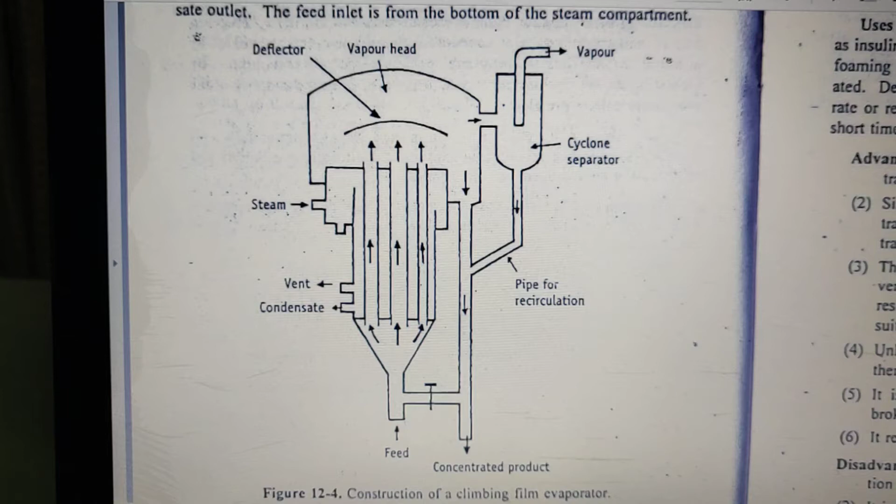Okay, now we'll take the third evaporator, that is climbing film evaporator. First we'll see from the book.

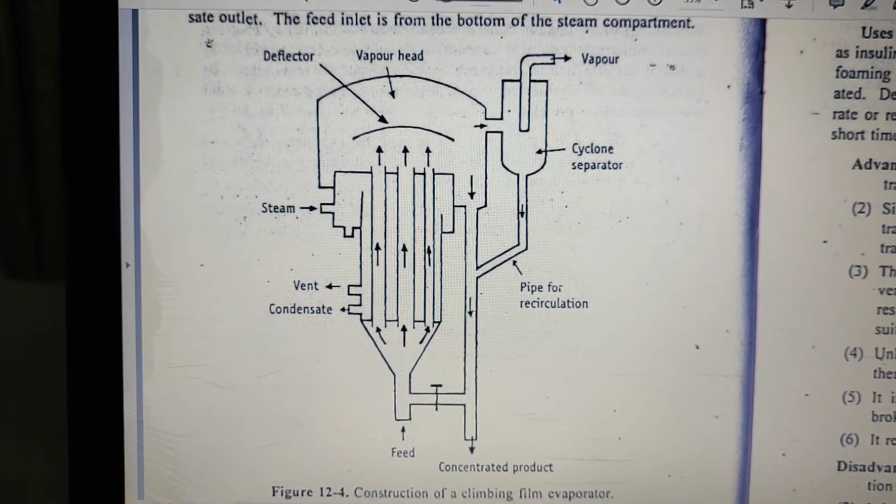From the diagram we can see clearly how the principle is there, and the principle itself explains what is the working of it. So you can see here you don't have tubes immersed.

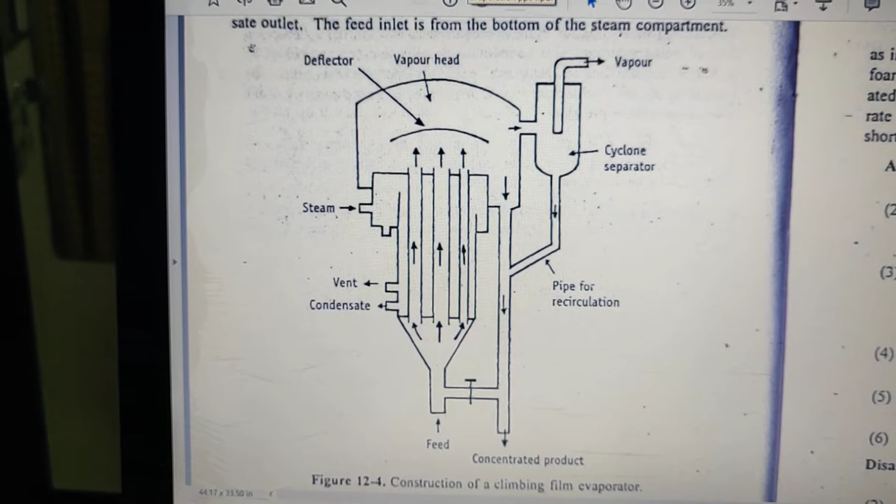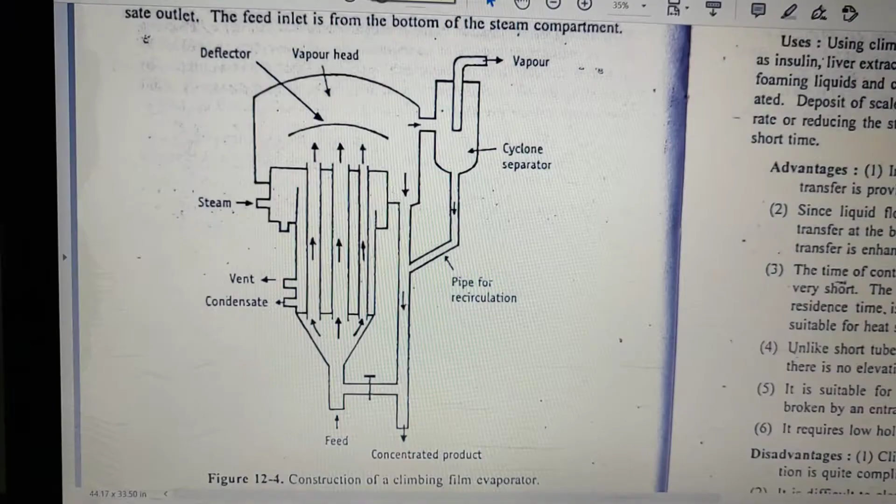Here what is fundamental is that the tubes are heated separately and your feed is heated separately. So what is the major advantage of this? Because these things are heated separately, the contact time in between the steam tube and your feed is very less. Steam means boiling, so you will not have a large amount of contact time between your tubes and your feed, and hence thermolabile substances can be very nicely evaporated using such evaporators, climbing film and even the next one, falling film.

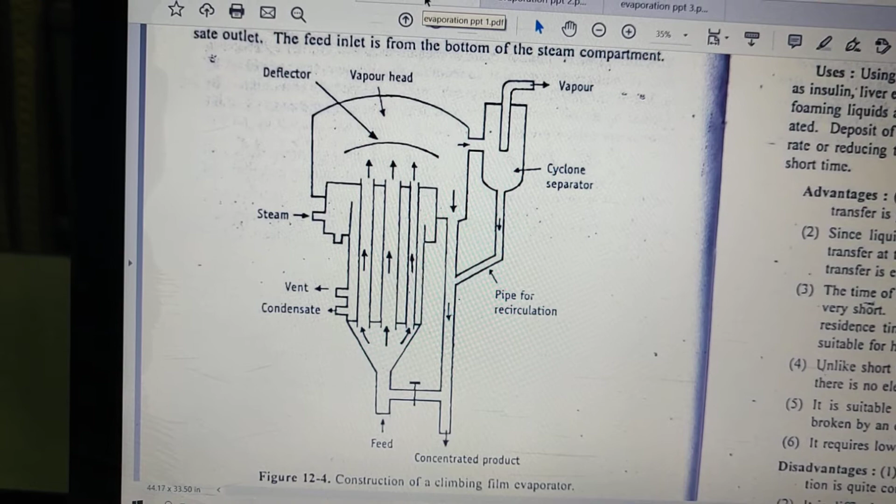So first we will see this. You all can see you have steam inlet, you have tubes, then feed inlet is there from which feed passes from the bottom to the top. So now it is not like your complete feed or solvent is immersed in it, or your tubes are immersed in that. You have different inlets for feed and steam.

Then you have two outlets. One is for vent, that is gases, and condensate. The condensed gases and non-condensed gases, whatever are there, get removed from vent and condensate.

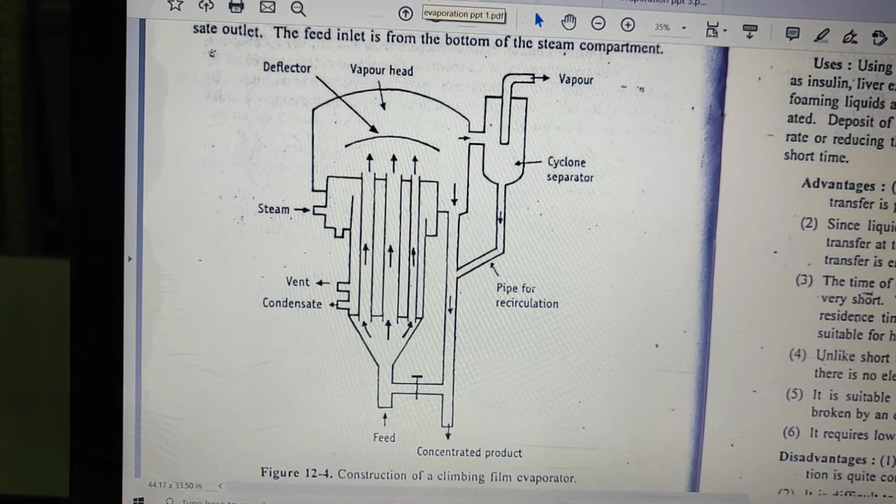Then you have a deflector. Now deflector is, we will see in the working, how the vapors form bubbles at the walls of the tubes, and these bubbles come together to form bigger bubbles, and then you have your concentrated feed also that goes from the bottom to the top.

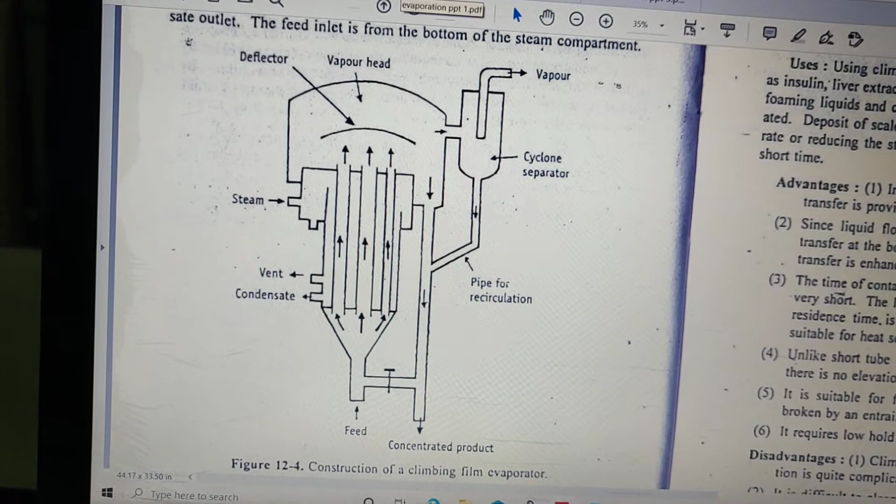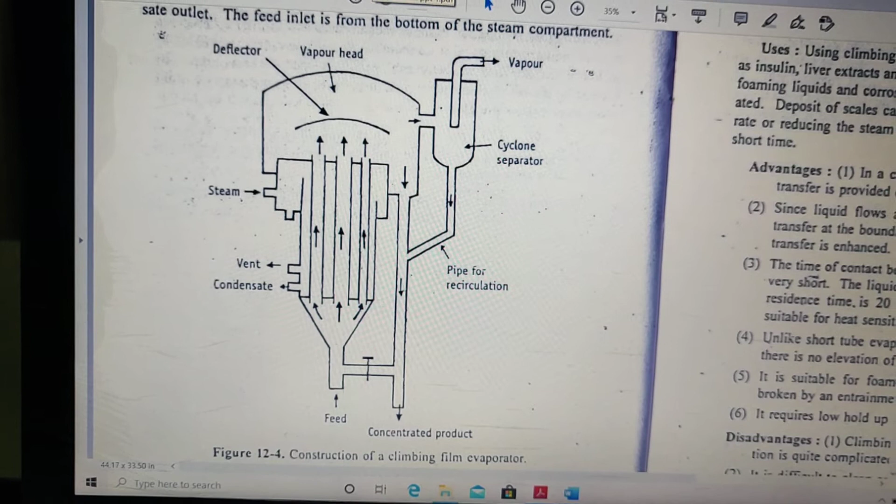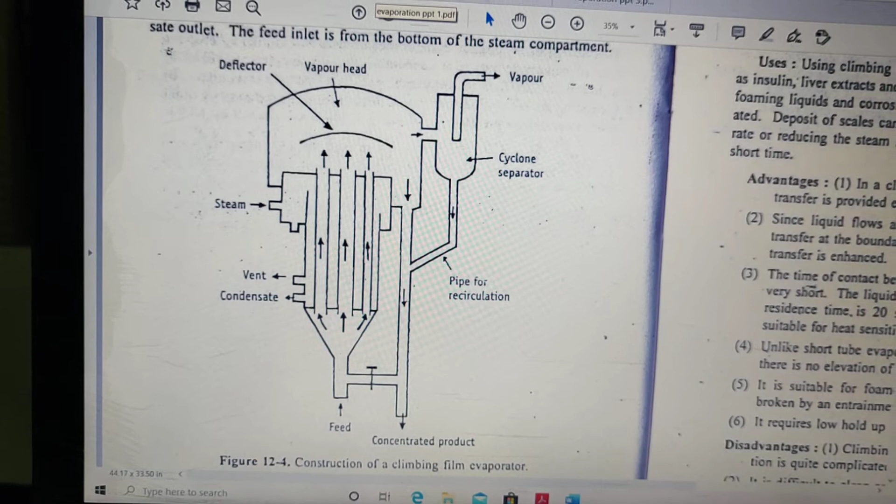So at the deflector your vapors, your bubbles and all come together and they are removed, you can see at the right hand side, from the vapor outlet, whereas your condensed feed goes down due to gravity, it comes below. So from the area at the bottom, where your feed was going inside, from that area itself your concentrated feed will come down.

So cyclone separator is something separate, you all know what cyclone separators are. So that separating device is very good for removing vapor from the top outlet, and your feed from the bottom outlet.

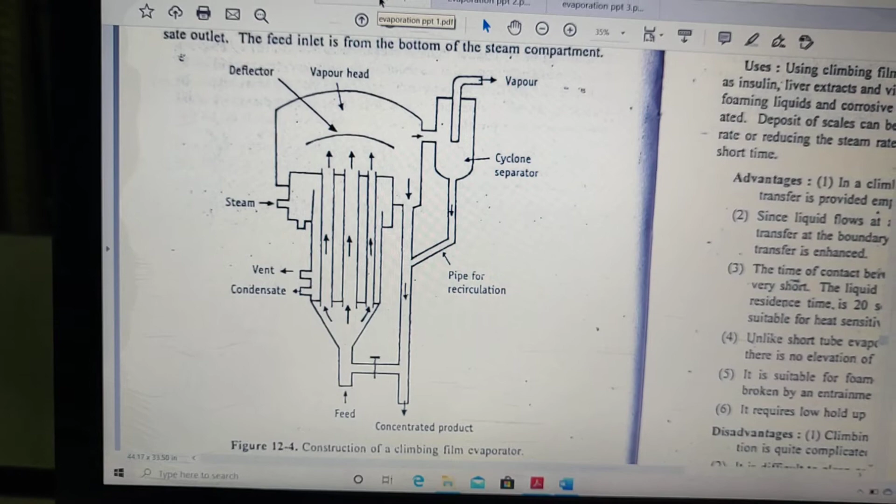Okay, so now I will tell you this in short. So what is the principle? Tubes are heated externally by steam, okay, that is boiling water.

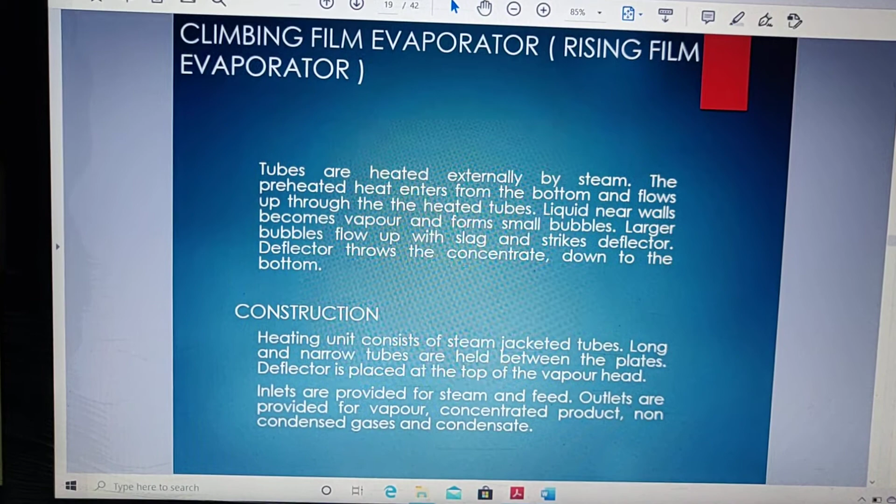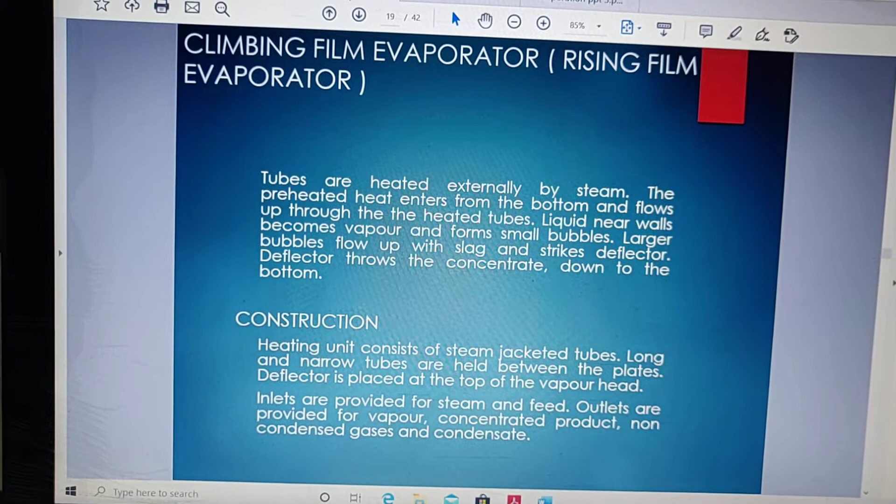Then the preheated feed enters from the bottom and flows up through the heated tubes, hence contact time is less. Then liquid near the walls become vapors and form small bubbles.

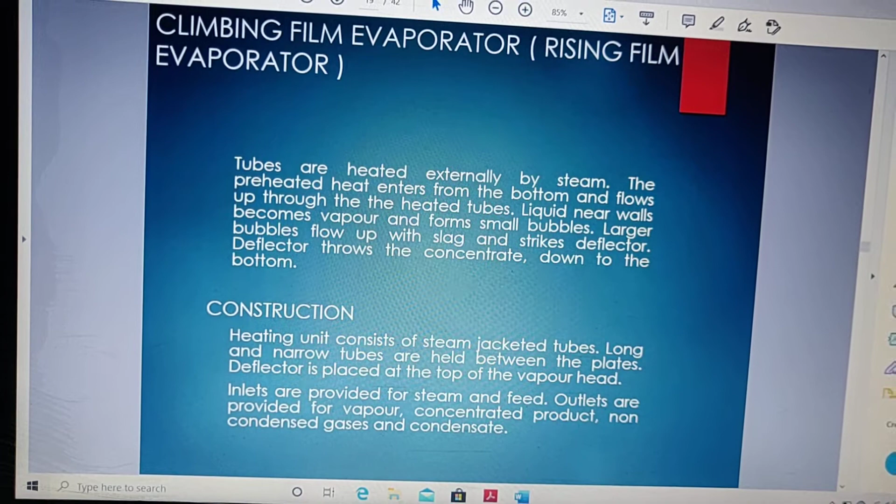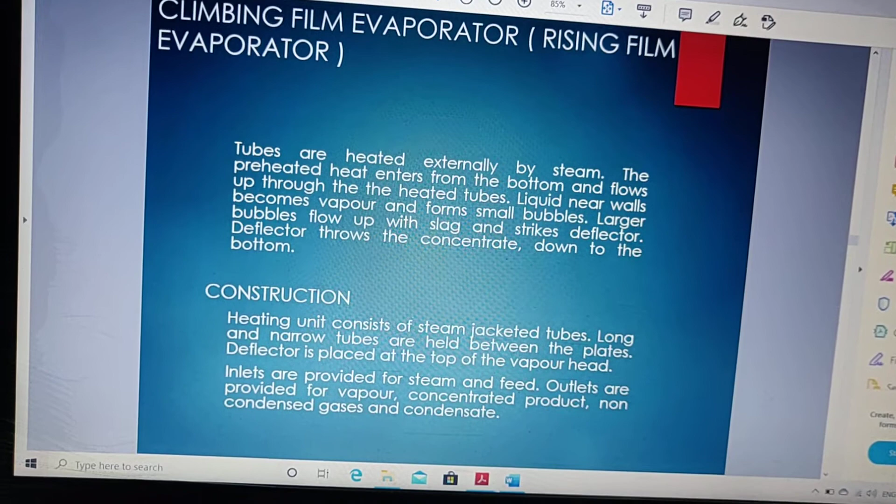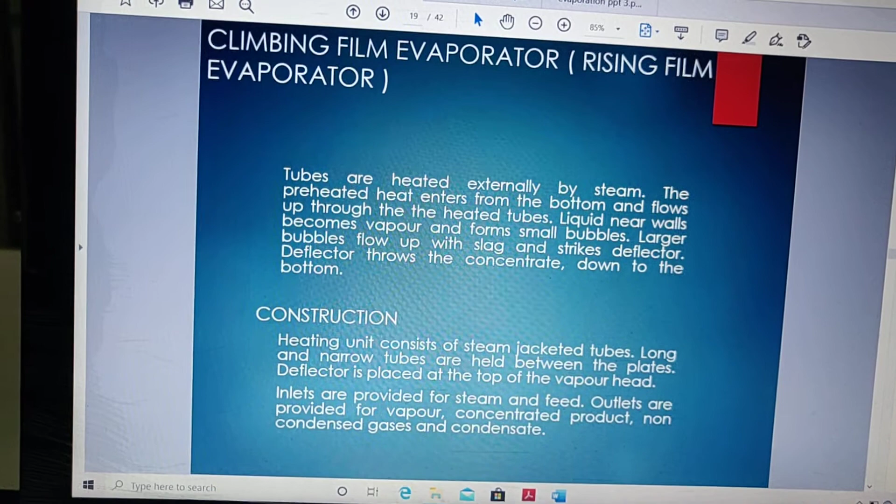Larger bubbles flow up with the slug - slug means whatever mixture is formed after heating goes up. So larger bubbles flow up with slug and strike the deflector, meaning something which deflects, like in meters you have digital meter reading, similarly you have a part of instrument which is a deflector.

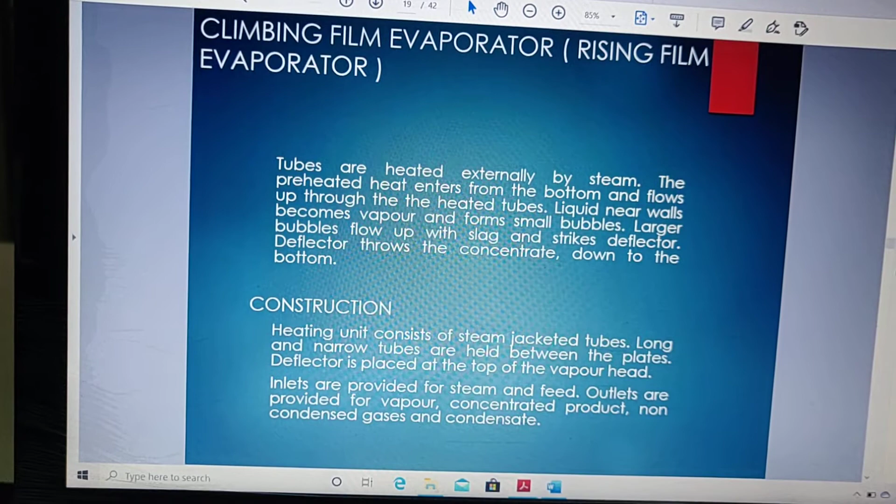So the deflector throws the concentrate down to the bottom, that is your product. Your concentrated product is thrown at the bottom due to its weight and due to gravity, whereas your lighter bubbles, that is the vapors which are evaporated, are thrown outwards at the top outlet.

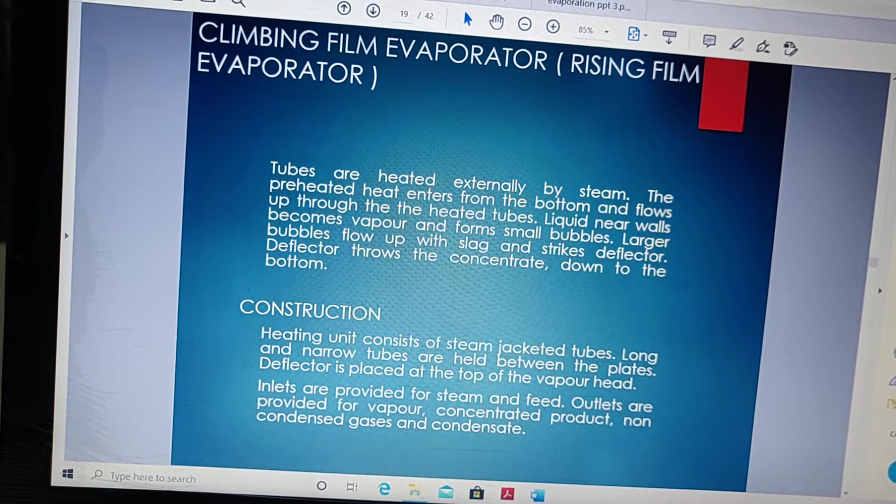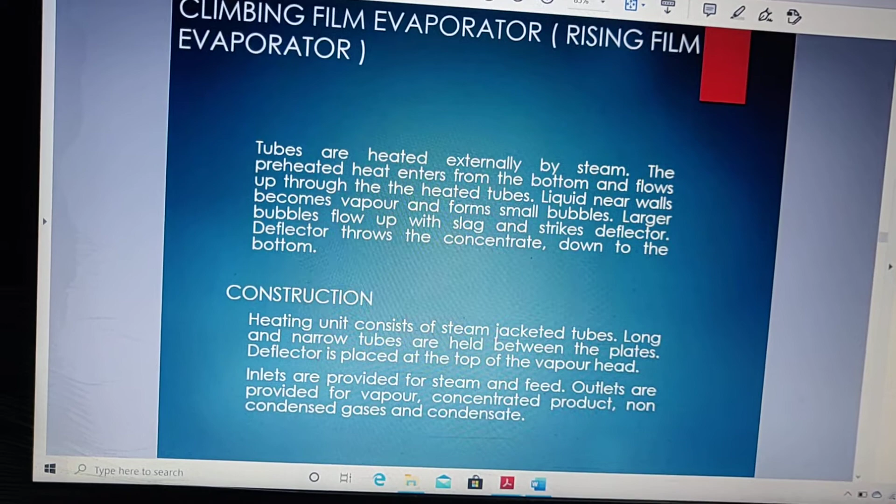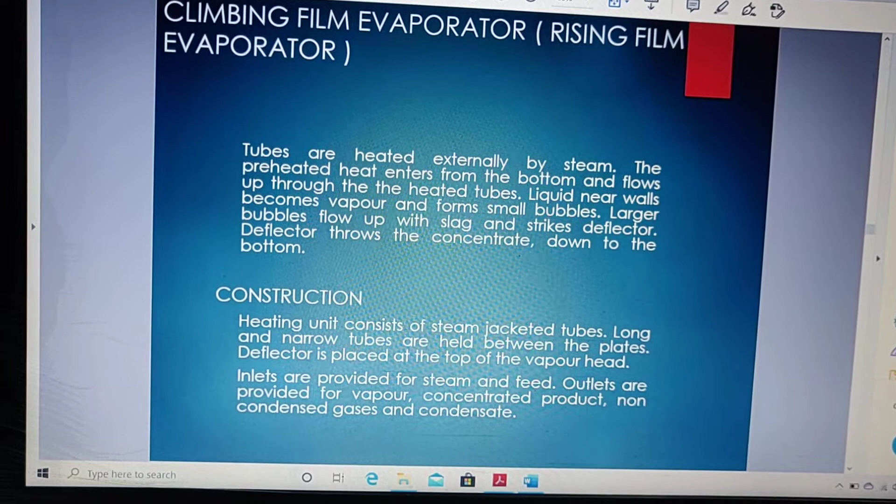So how is the construction? Heating unit consists of steam jacketed tubes. Long and narrow tubes are held between the plates. Deflector is placed at the top of the vapor head. Inlets are provided for steam and feed. Outlets are provided for vapor, concentrated product, non-condensed gases and condensate.

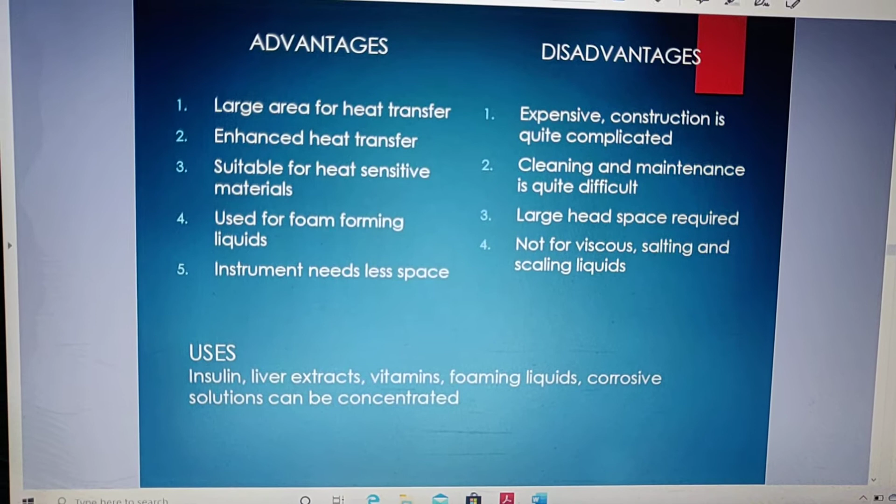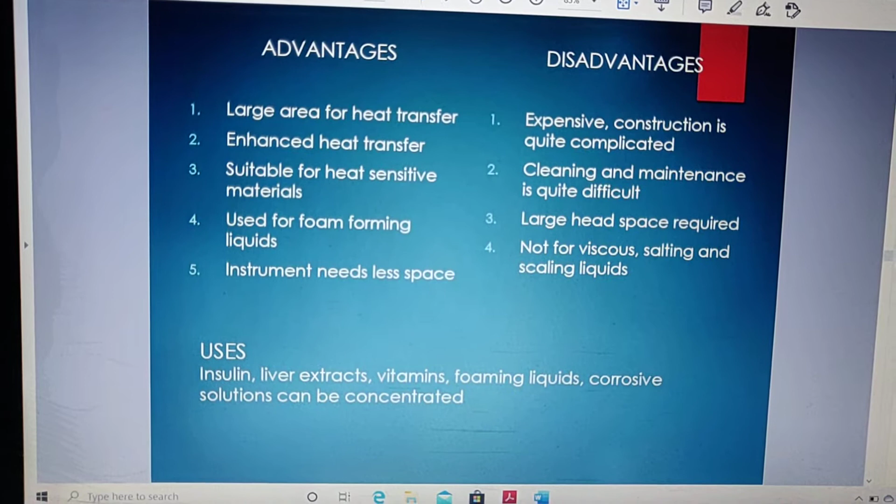Okay, now we will see the advantages and disadvantages. There are a lot of advantages and certain disadvantages as well. So advantages: large area is there for heat transfer since you have tubes. As we had seen earlier, due to that coiling and all, you have large surface area, and due to all these things, there is enhanced heat transfer.

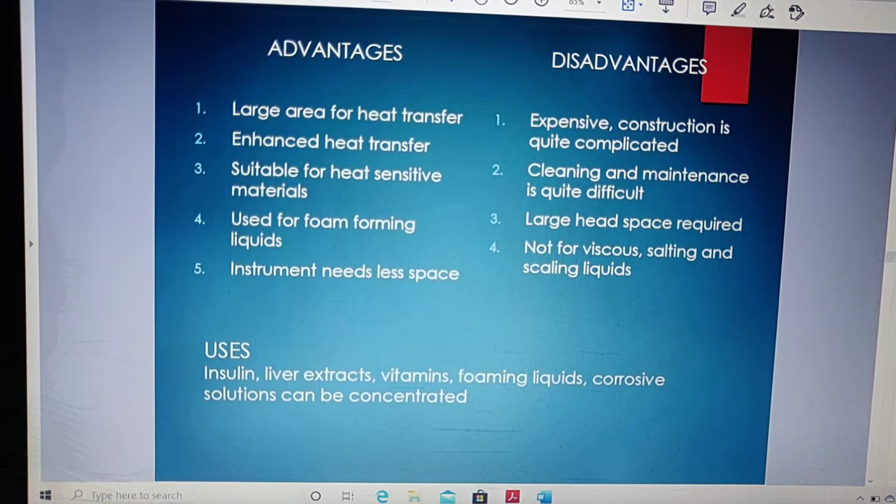It is suitable for heat sensitive material, so that is one very good advantage. Then next, it is used for foam forming liquids - if you have bubble forming liquids, that is on evaporation it will form bubbles, this instrument is good for such liquids. Then fifth, the instrument needs less space.

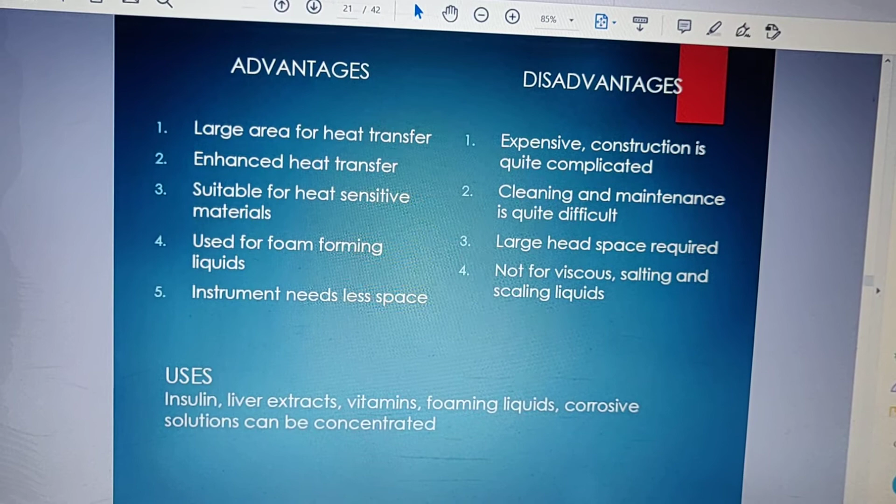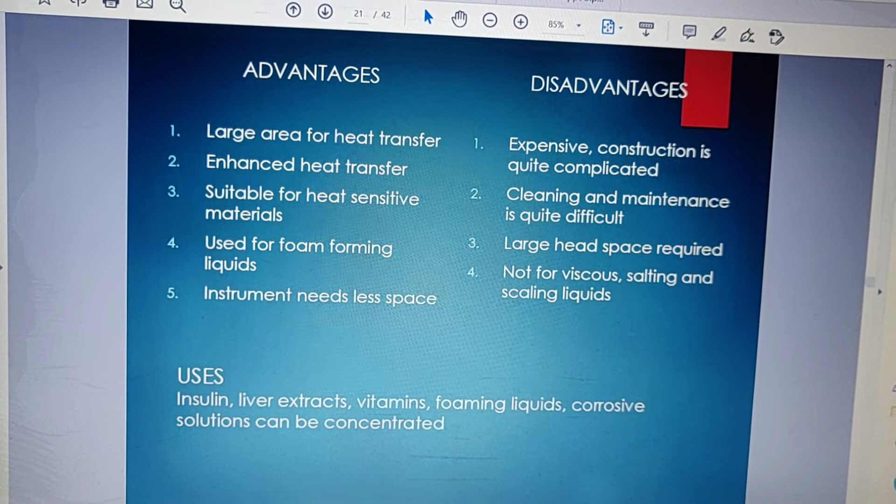What are the disadvantages? It is expensive, construction is quite complicated. Why complicated? Because you have to heat the tubes separately and you have to heat your feed separately. So all this makes the construction quite complicated, and you have to assemble and disassemble the assembly all the time.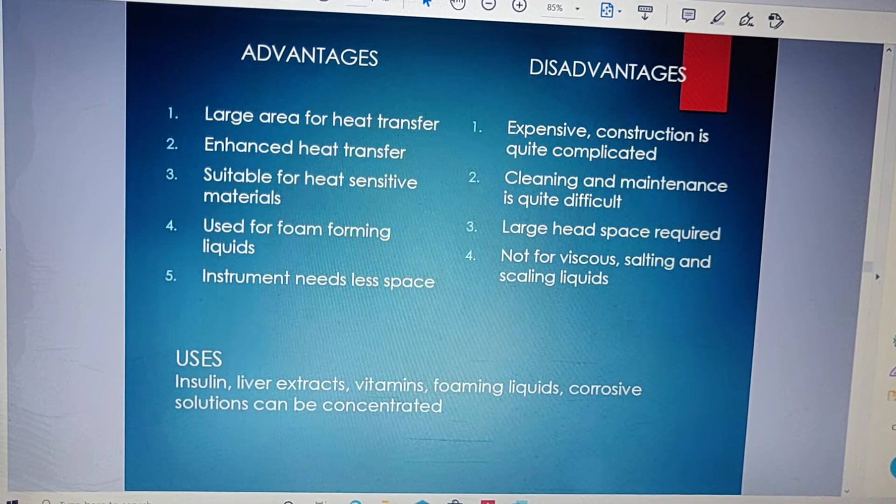Then cleaning and maintenance is quite difficult. Large headspace is required - headspace meaning the area for the setup and assembly is required more, that is, as compared to steam jacketed kettle, here headspace is required more.

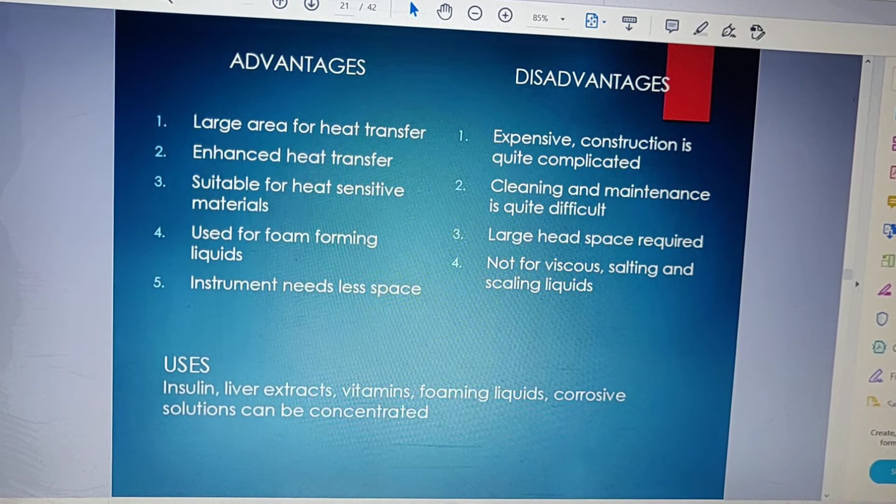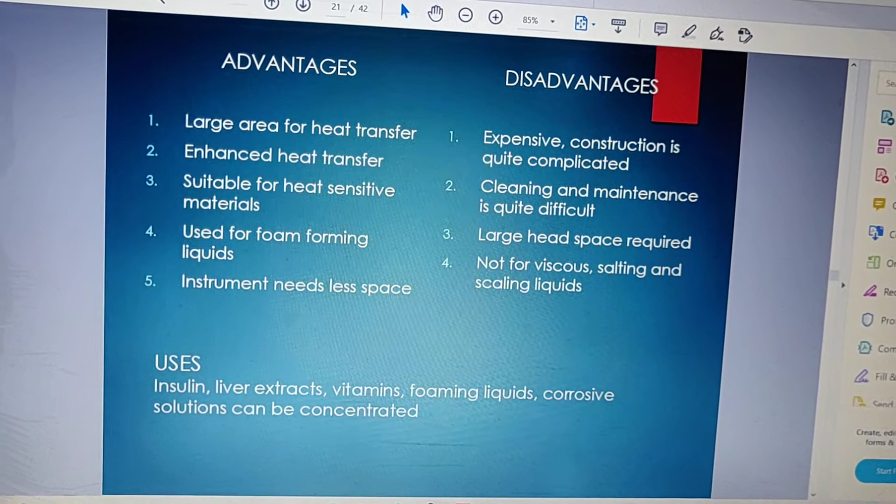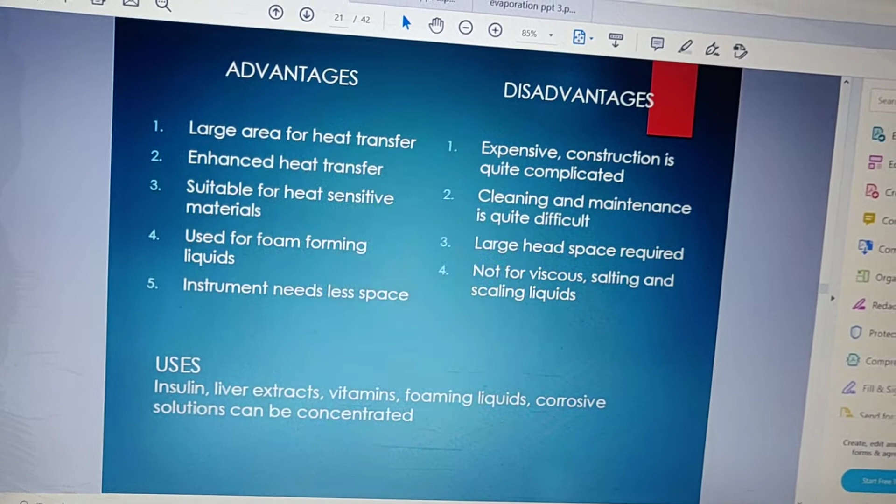Then this is not suitable for viscous, salting and scaling liquids. Why? Because your feed is entering from the bottom and going through the top, so if your material is very viscous, or it is a scaling liquid that forms scales during heating and all, this will clog the tubes and your instrument may stop in between. So this is not good for viscous, salting and scaling liquids.

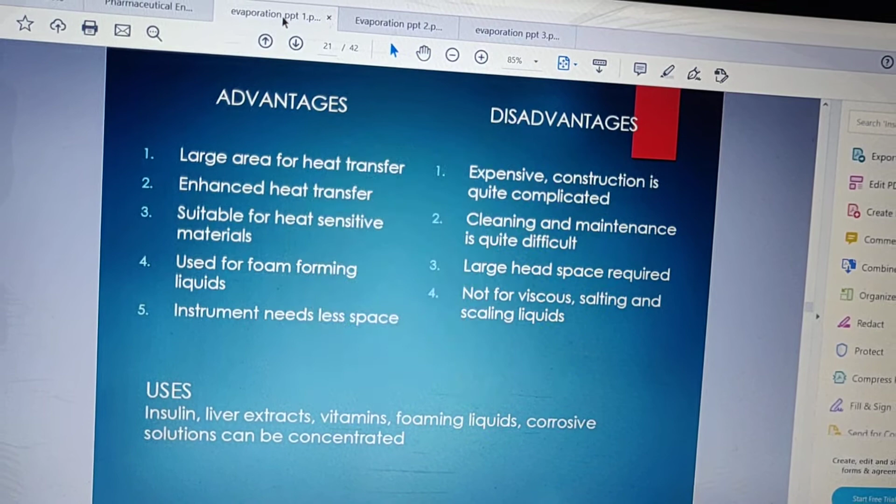Salting meaning precipitation, giving out precipitate during heating and all. So for such samples, it is not preferable.

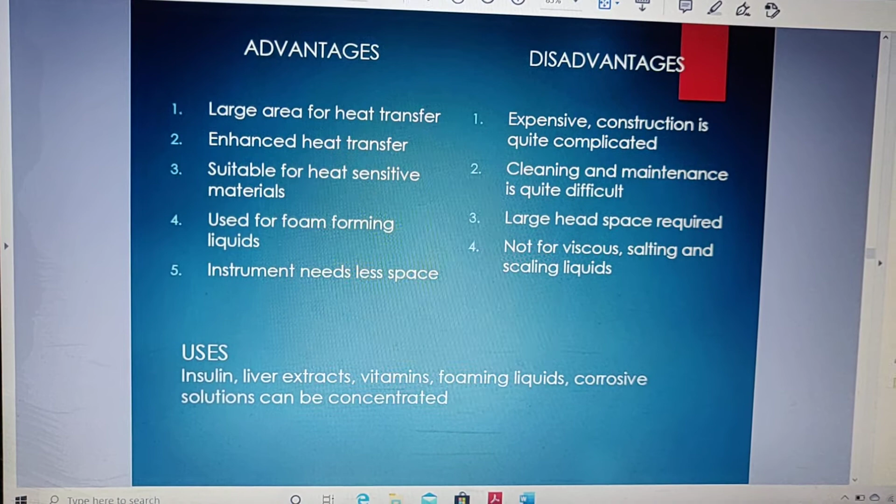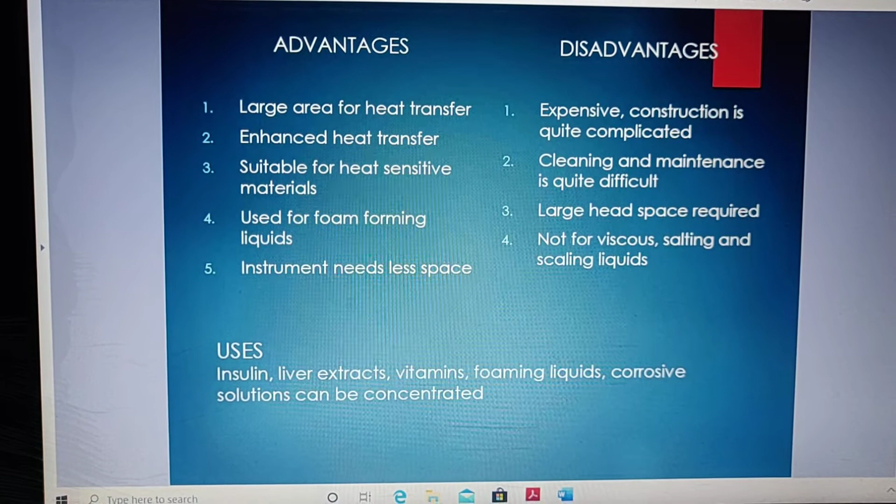Then what are the uses? Since we said it is useful for thermolabile, thermosensitive substances, it can be used for evaporation of excess solvents or anything in case of insulin, liver extracts, vitamins, foaming liquids, corrosive solutions, etc.

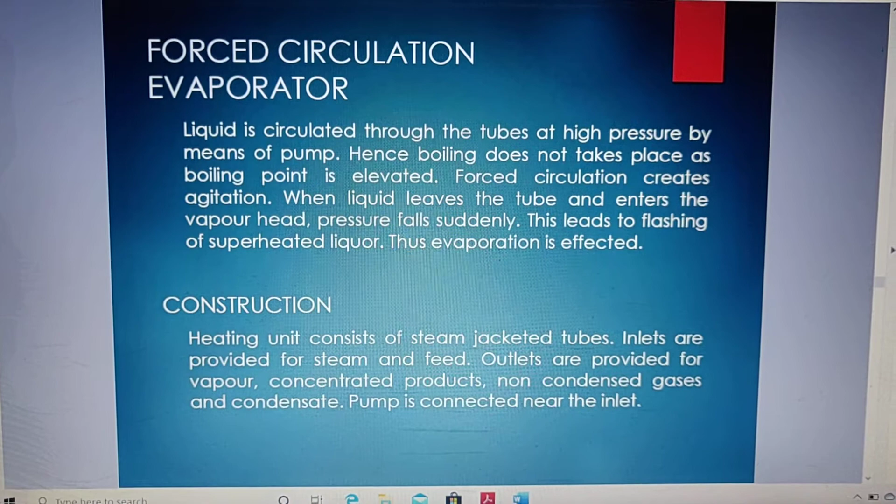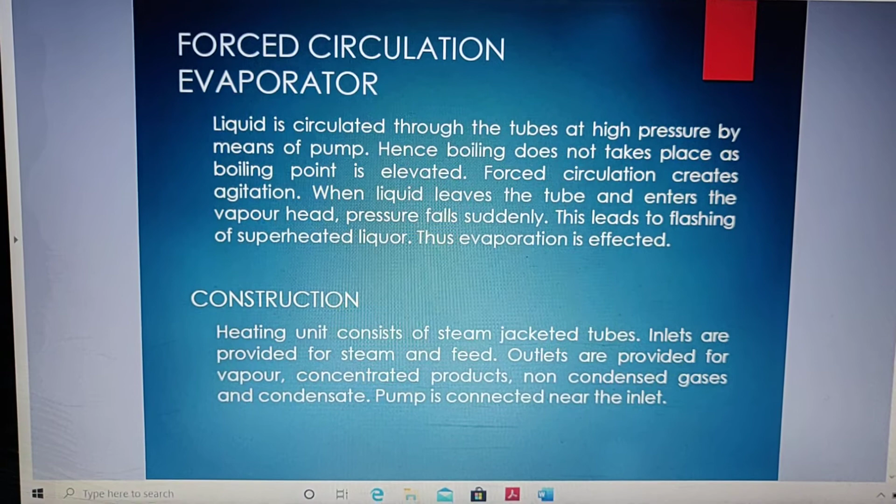Now next similar is forced circulation evaporator. Almost similar diagram we will see for forced circulation evaporator. Keep in mind, diagrams are to be studied from the book itself, and even construction, working points, everything is given nicely in the book. So more advantages, disadvantages you may see in the book, make a note of it properly. Now we'll see forced circulation evaporator.

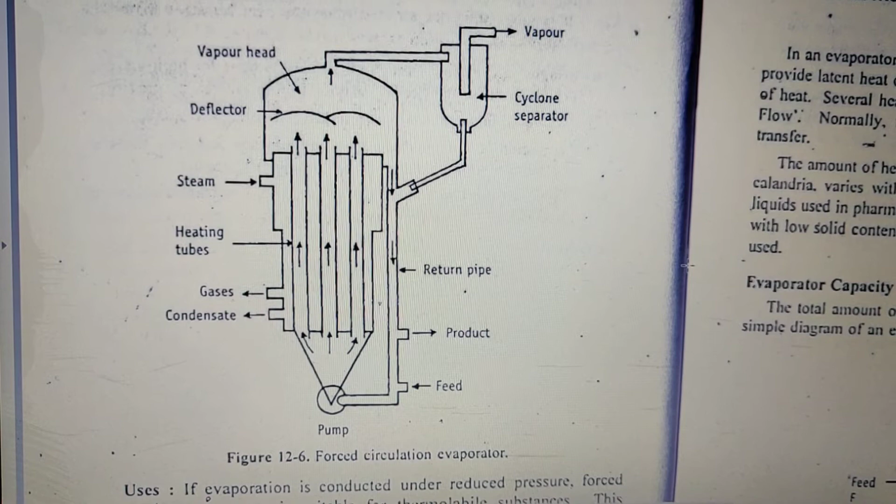Now look at the diagram of forced circulation evaporator. You can see it is almost similar to the earlier diagram. So what is the difference we have to see?

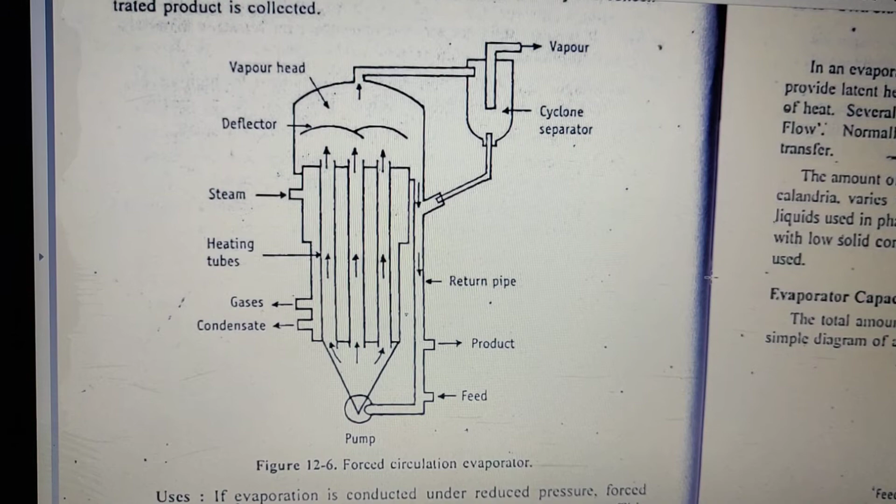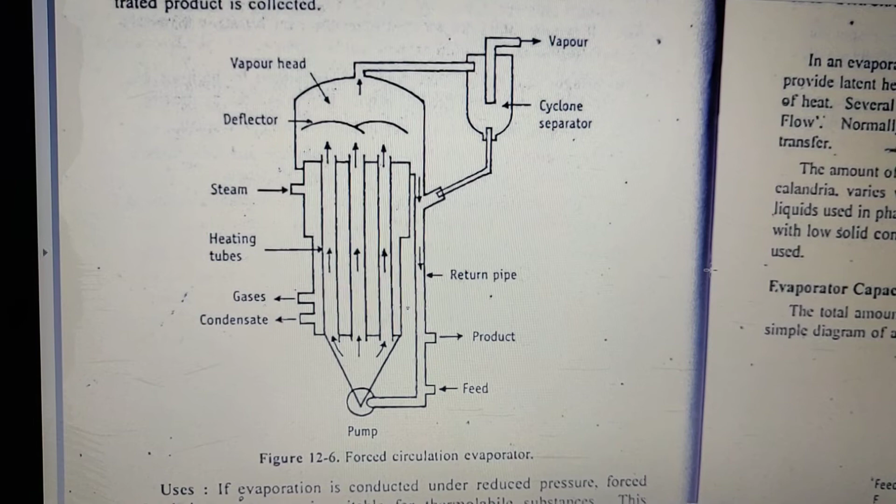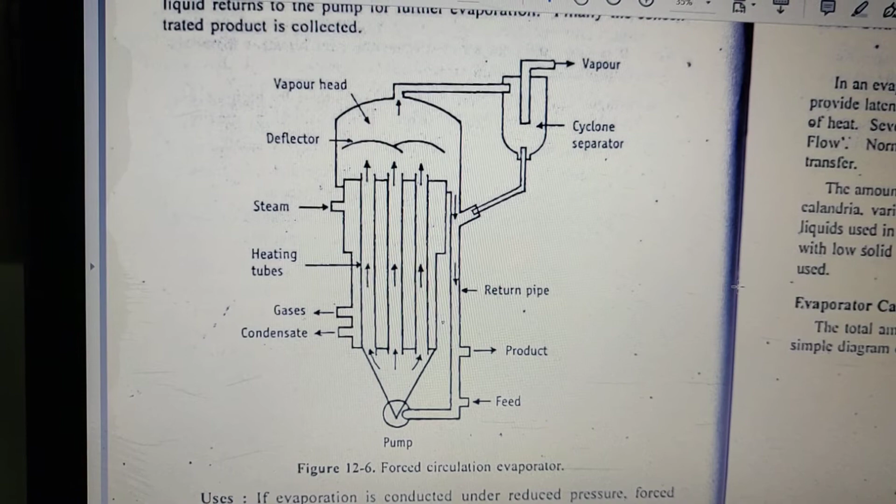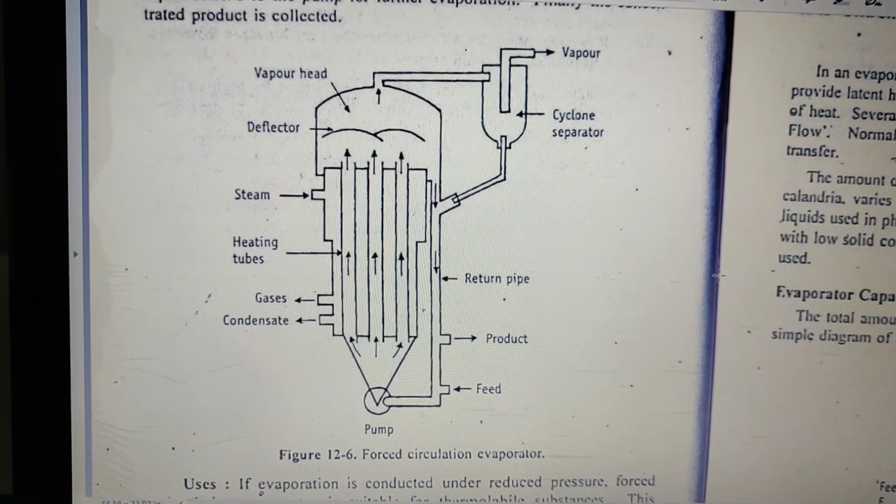The difference you can see at the bottom. A pump is provided - that is the main difference in forced circulation compared to the earlier one. Why is that pump required? As the name suggests, forced circulation - you are forcing the circulation of the feed into the evaporator assembly, and that force has many advantages. You can now use viscous solutions, which you couldn't use in the earlier evaporator, because you have pressure exerted due to this mechanical device. So even viscous substances, which was a disadvantage earlier, here is of advantage.

Other things you can see are similar - the heating tubes, the outlets for gases, non-condensed gases, condensate. Feed inlet is at the bottom, product is also at the bottom, like the earlier one. Then you have deflector, vapor head, cyclone separator, vapor. So almost everything is the same.

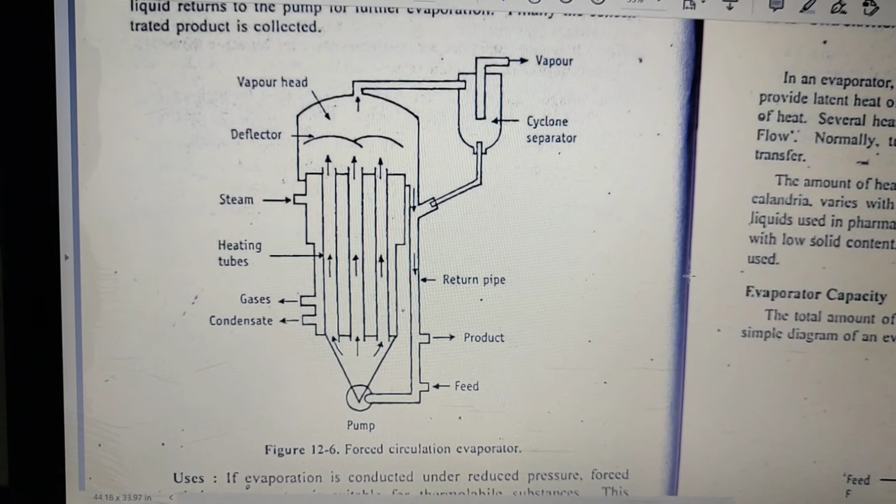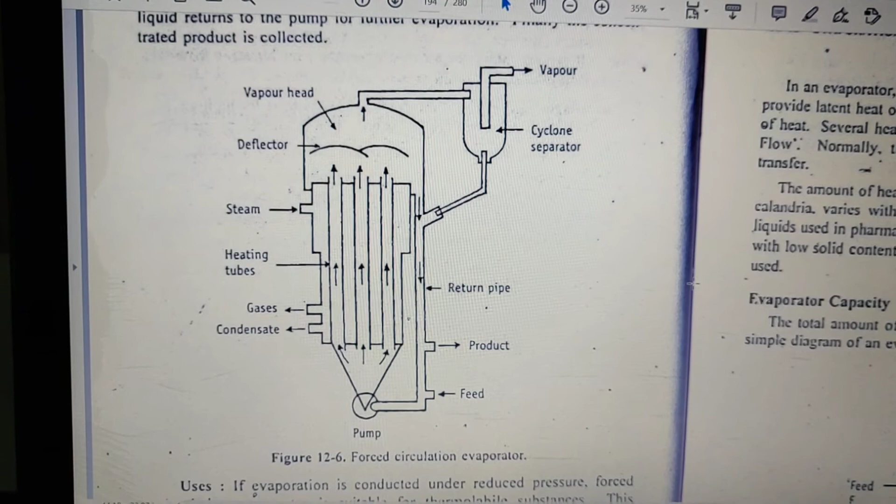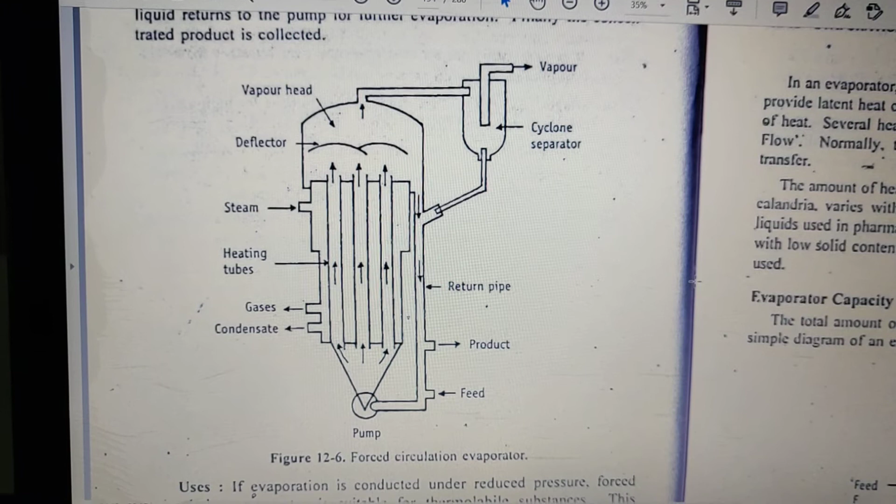The difference is in your pump. The pump gives you good forced circulation. Another advantage is due to this - once the solution leaves the tube, there is a sudden pressure drop inside the assembly. Due to that pressure drop, rate of evaporation or evaporation efficiency increases. So this is the overall advantage of using a pump instead of a normal assembly - an addition to the climbing film evaporator.

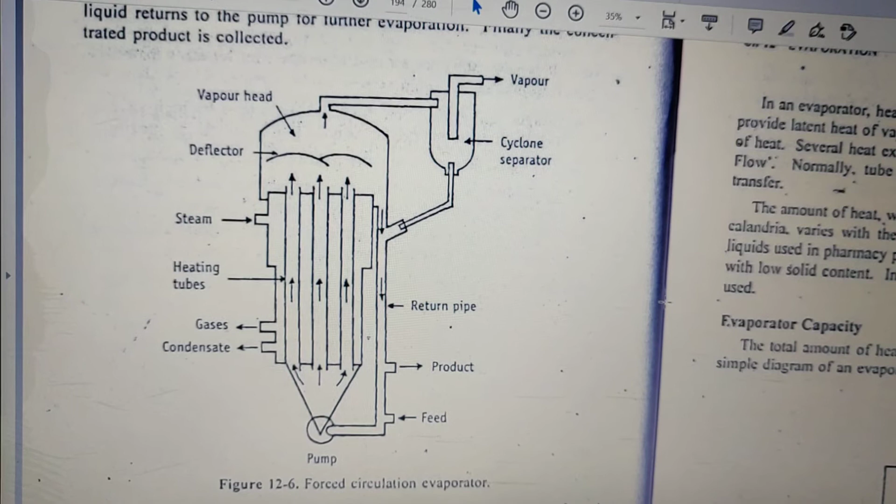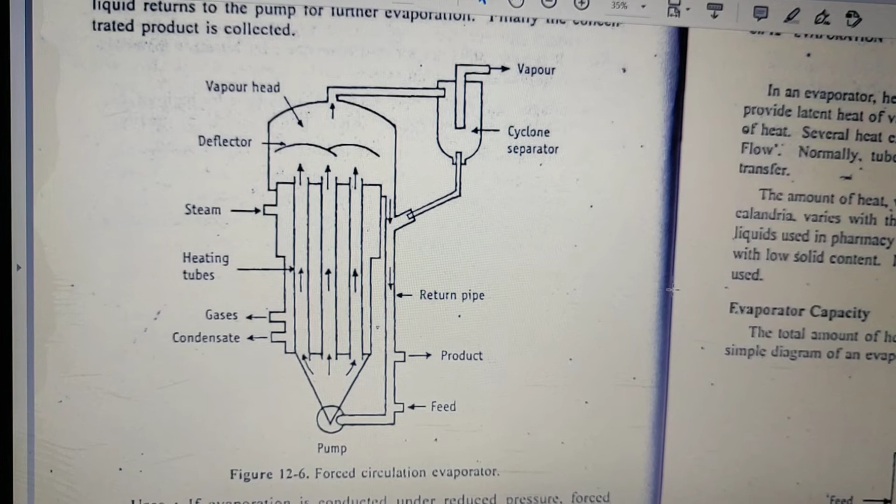So the difference from climbing film evaporator is the addition of pump, which gives many more advantages. Forced circulation will have much more advantages as compared to climbing film evaporator.

Now we'll see here in short. The principle: liquid is circulated through the tubes at high pressure, by means of a pump at the bottom. Hence boiling does not take place as the boiling point is elevated.

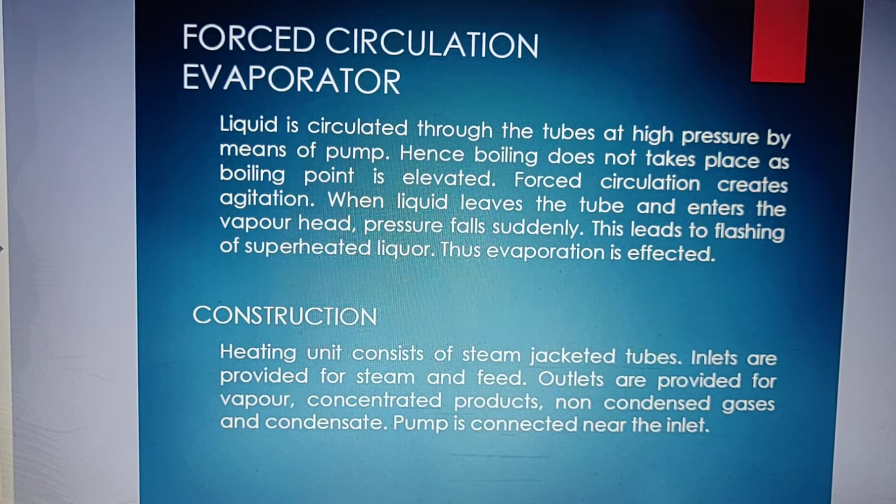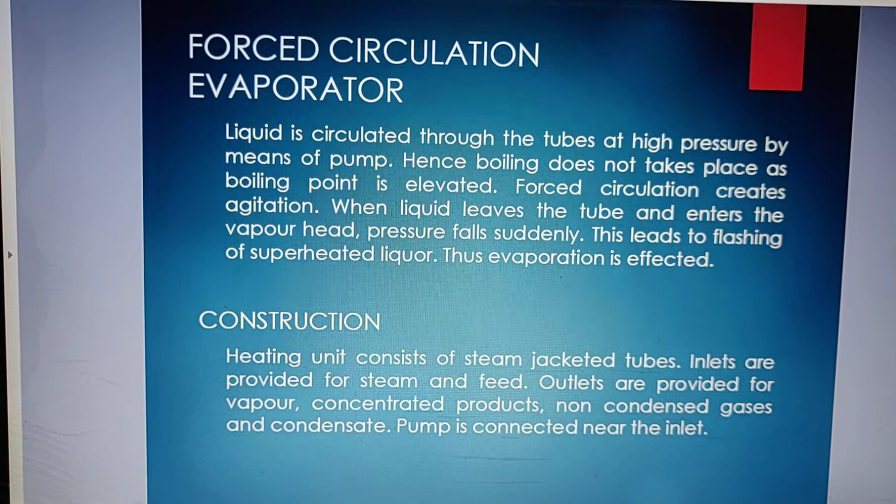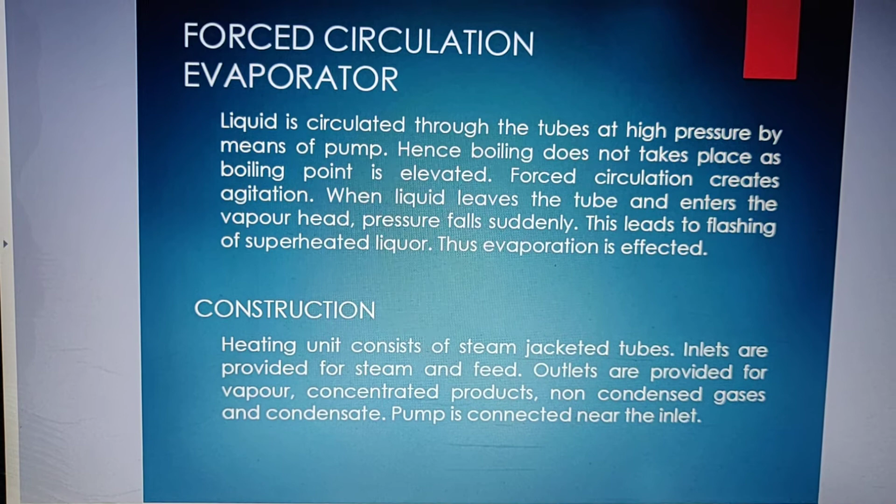Forced circulation creates agitation, which is also there now. We had seen in factors affecting evaporation - if there is more agitation, there is more rate of evaporation. So when liquid leaves the tube and enters the vapor head, pressure falls suddenly - from the pump, from bottom to top, the pressure was high, and when it leaves the tube and enters the vapor head area where the deflector is, pressure falls suddenly. This leads to flashing.

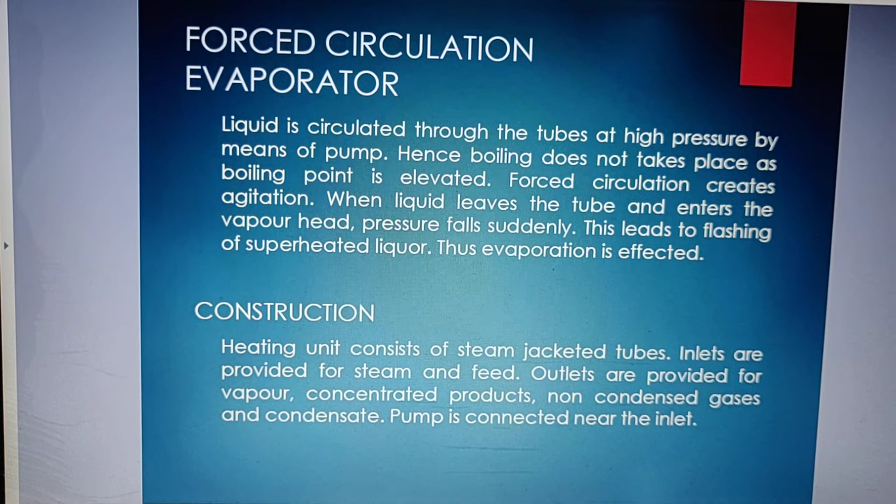Flashing meaning sudden movement of the superheated liquor - all the concentration has gone above now in the vapor head area. Thus evaporation is favored. So that is the advantage of using a pump.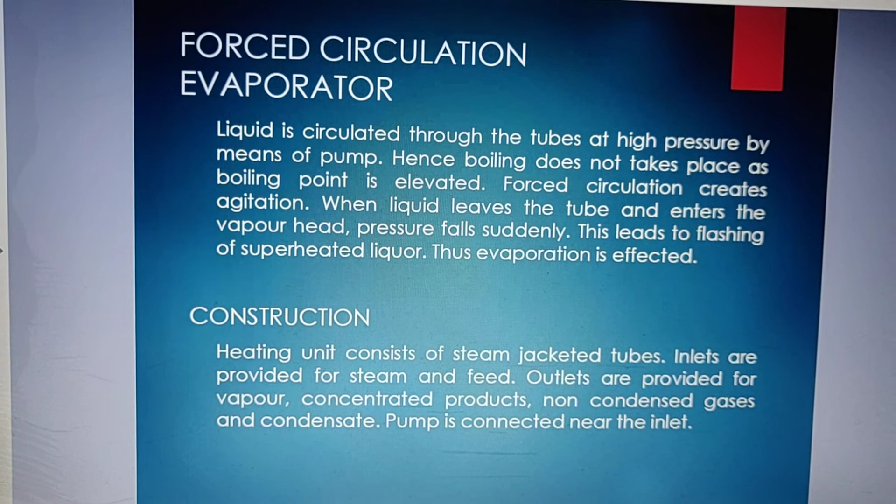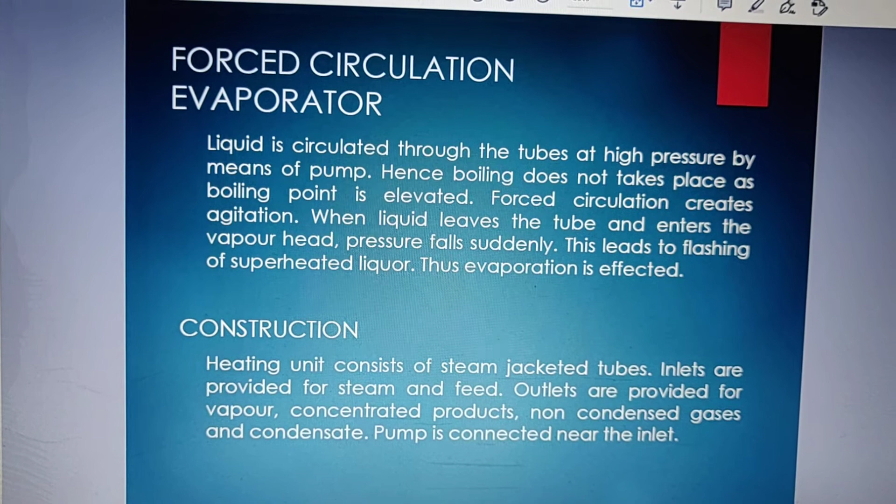Construction: heating unit consists of steam jacketed tubes. Differently here, you have heated the tubes, and the heating unit consists of steam jacketed tubes - so your tubes have a steam jacket as well for heating.

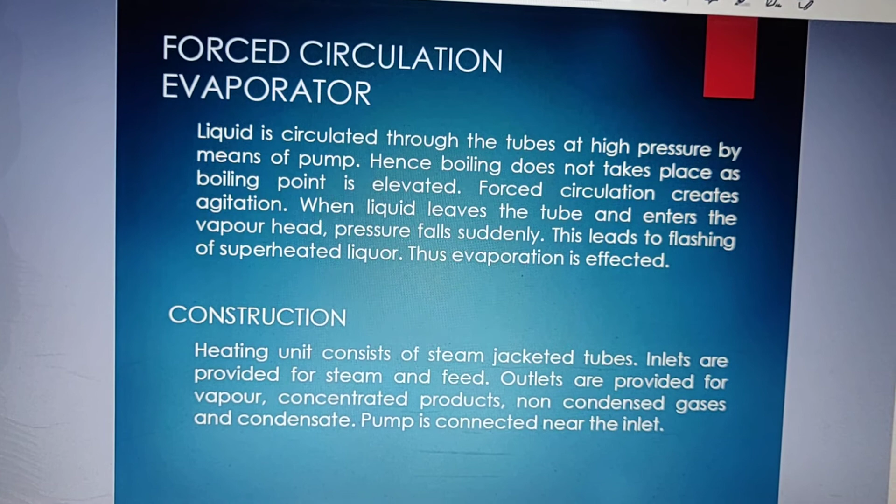Then inlets are provided for steam and feed. Feed enters from the bottom which goes to the top. Outlets are provided for vapor, concentrated products, non-condensed gases and condensate. Pump is connected near the inlet at the bottom.

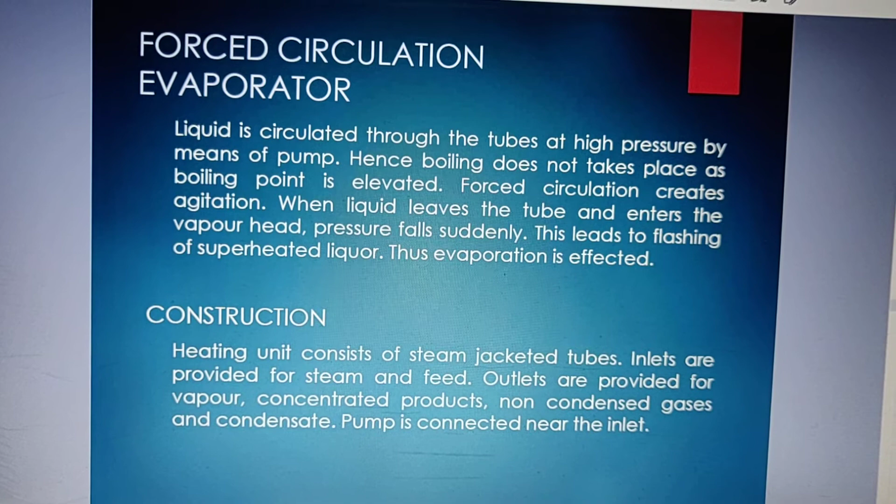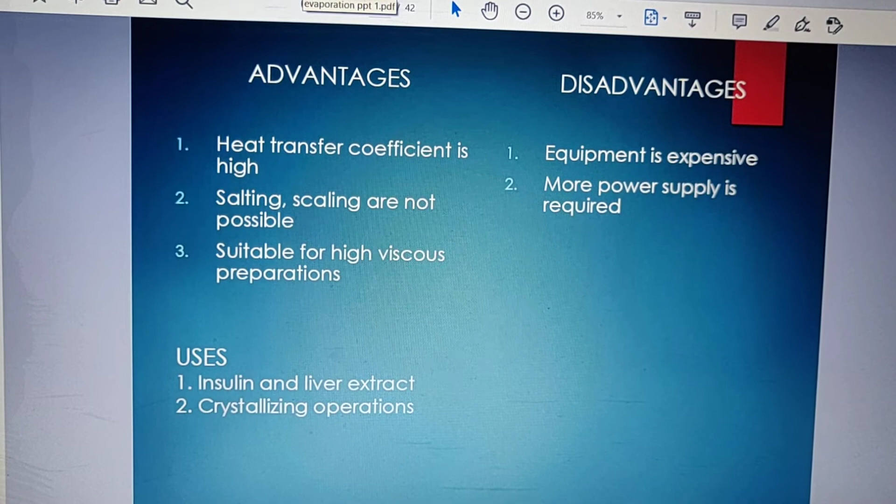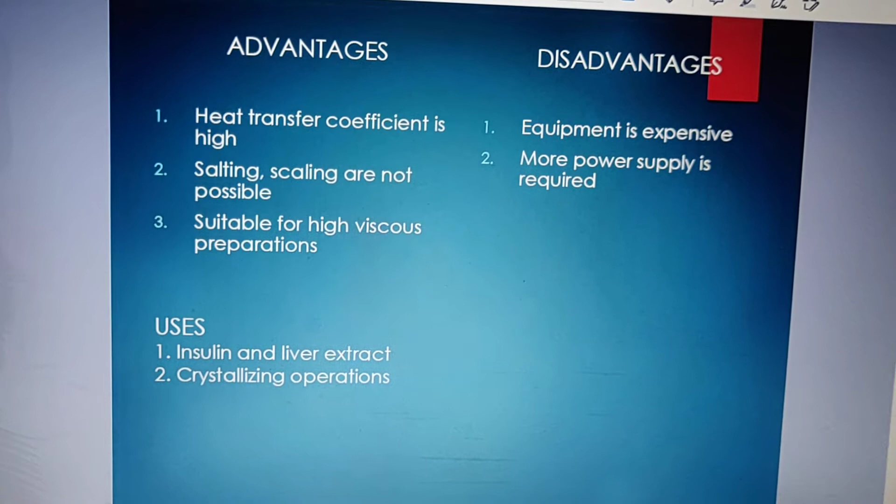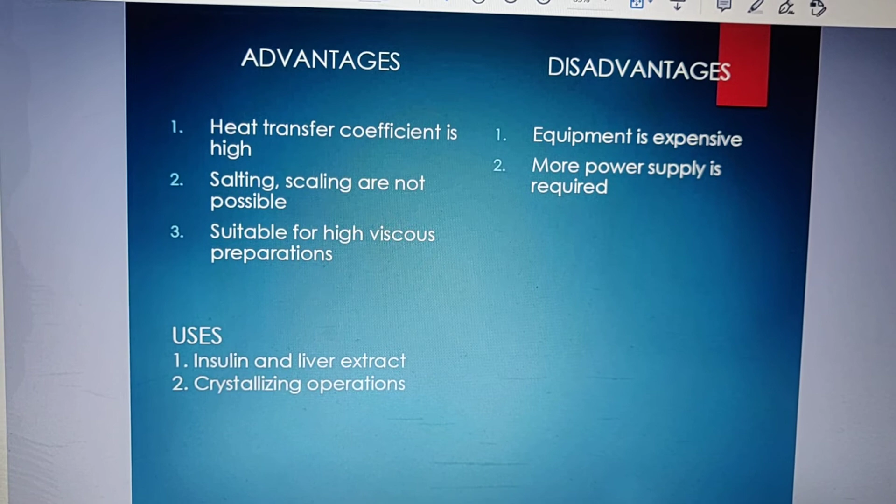Now we will see the advantages and disadvantages. Advantages: heat transfer coefficient is high. Salting and scaling are not possible, since there is forced circulation, contact time is very less - due to this, precipitation and scaling on the walls is not at all possible. A greater advantage is it is suitable for high viscous preparations, like syrups and such thick solutions. So this forced circulation evaporator is of use.

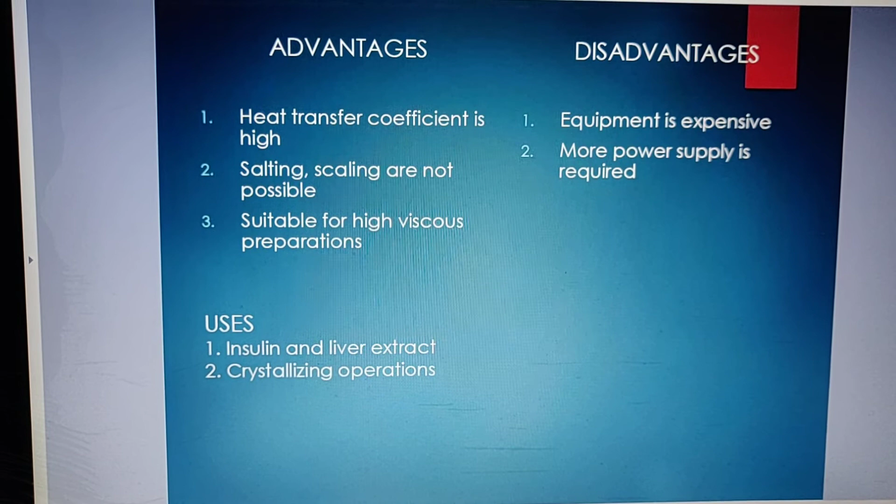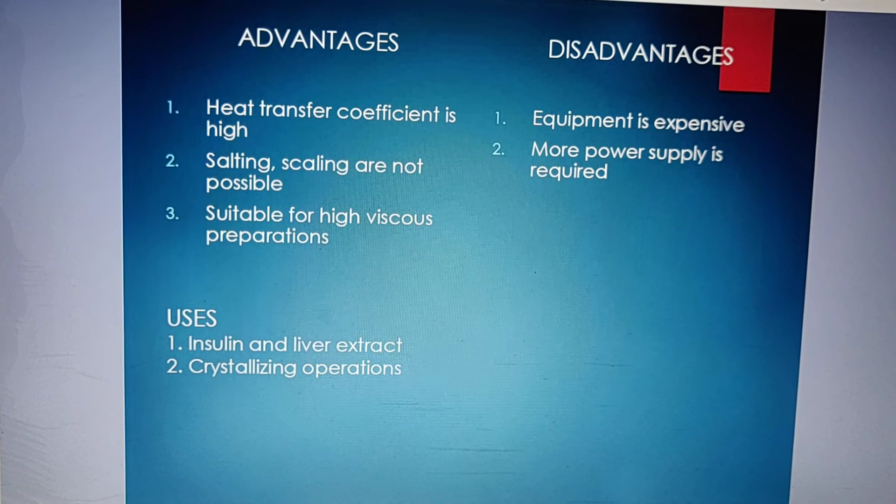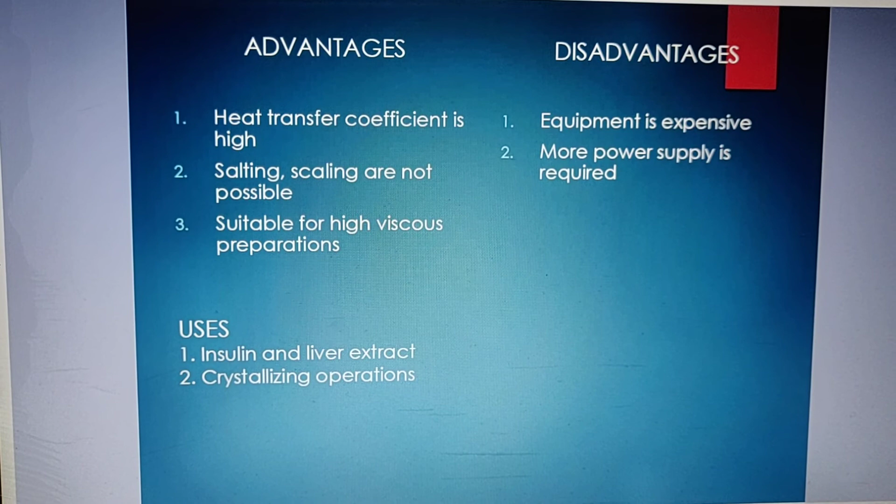What is the disadvantage? Since this instrument uses power supply, more power is required, and this makes the equipment expensive. Uses: insulin and liver extract - possible in the earlier instrument also, but this can also be used because they are thermosensitive. So this is a better option compared to the earlier climbing film evaporator. Another use is crystallizing operations - for crystallization process also we can use forced circulation evaporator.